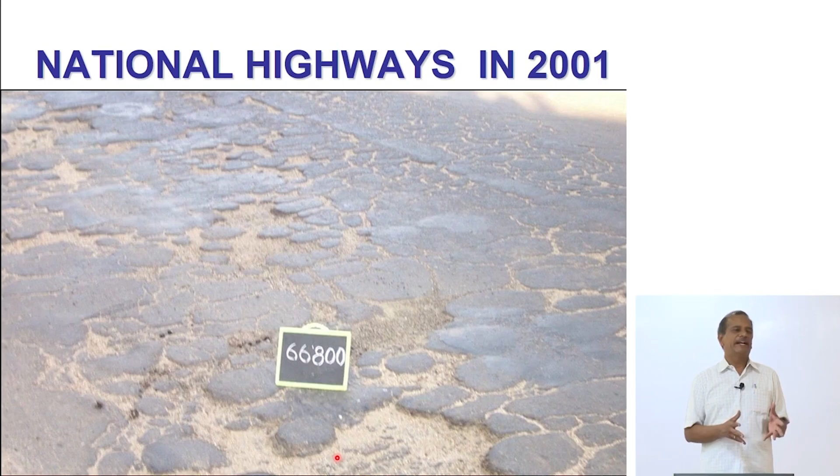But by the by, are you able to see any improvement in the quality of the roads in the country? No? Let me take you over what has happened over the last 15 or 20 years, and then you will realize what are the changes that we have made in the profession. So, if you look back in 2001, this was the condition of the national highways. The condition of the national highways from this condition in 2001 has improved over a period of time.

When we look at the conditions of the highways, what we realized from America is that America is rich because it has got better quality roads, not that America is rich and hence it has got better quality roads. The country's economy depends upon the quality of the roads. If you have good quality roads, that means the country is prosperous. I think India has now learnt from the USA. This is a well-known saying from John F. Kennedy, that it is not the wealth that builds the roads, but the roads that build our wealth.

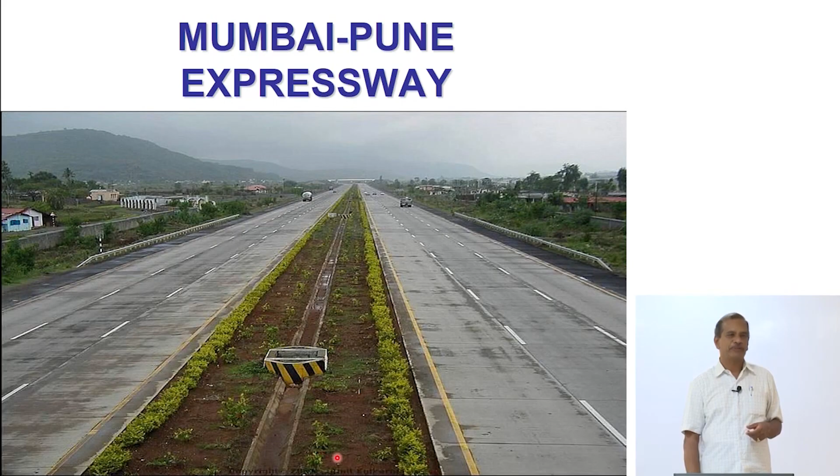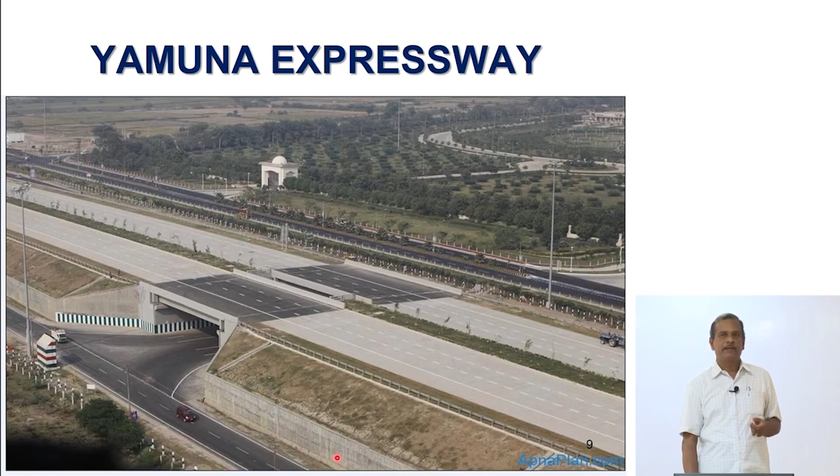Indian highways today: you said that there has not been any significant improvement in the quality of the roads. Let me show some photographs of the roads today. The conditions of roads which were very bad earlier have improved today. This is a classic example of the Mumbai-Pune expressway. We have other highways which are comparable to any other developed country of the world. We are able to see beautiful roads, scenic roads in the country today. This is a classic example of the Yamuna expressway today.

Having seen this, do you still believe that there is no improvement in the quality of the roads? Or do you think that there is an improvement? There has been improvement in the quality of the roads. But what you do not understand is: what is the cost of constructing these highways? What are the design factors? What are the issues or challenges which a civil engineering professional will face in the country during the construction, maintenance, and operation of these highways? Let me take you over the issues one by one.

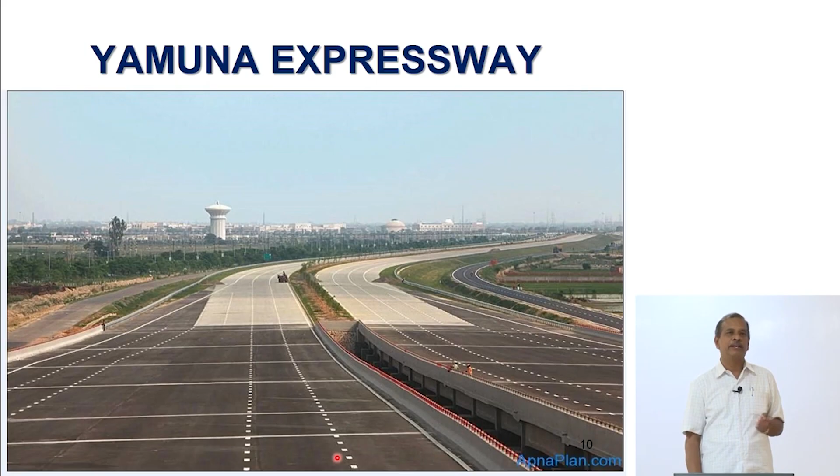If we look at the roads in the country today, this is the Yamuna expressway here. India has got the second largest road network in the world. They carry about 85% of the passenger traffic and about 70% of the freight traffic. National highways are around 1 lakh and odd kilometers, which, I will come to the statistics, constitute less than 2% of the country's road network but carry 40% of the traffic. Many of the highways are single lane or 2 lane; only a fraction of them are 4 lane, 6 lane or 8 lane highways.

Many of them are poorly surfaced, highly congested, and speeds are very low. If you go to any other developed country of the world, you will be able to travel at an average of around 80 to 100 kilometers per hour. But in India, we were able to travel only at a speed of around 30 to 40 kilometers per hour. The other agony or problem that we face in the country today is that India has got nearly 4.2% of the world's vehicles, but contributes nearly 9 to 10% of the fatalities.

So, the question arises at this point of time: good quality roads, high speeds, more fatalities. Poor quality roads, less speed, less accidents, less fatalities. So, what is it that you need? You need safety or you need faster movement of people and goods? But as you are aware, Indian traffic is heterogeneous in character. There are nearly 14 to 15 types of vehicles using the same carriageway. The speed differential between vehicles is more, with the result that there are several road crashes.

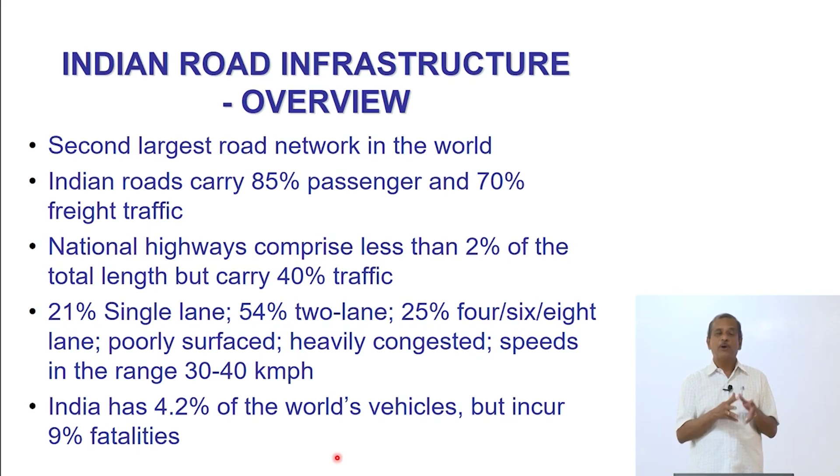So, with the result, we need to design forgiving highways. How to design the forgiving highways is a challenge before us. So, having said this about the quality of the roads here, in India, we have nearly 1,20,543 kilometers of national highways. When we talk about 2 lane, 4 lane, 6 lane, they come under this category of 1,20,543.

State highways constitute nearly about 1.55 lakh kilometers. So, out of the 54 lakh kilometers or 5.4 million kilometers of road in the country, less than 2 lakh kilometers are only national highways and state highways, 3 lakh kilometers. The balance of 52 lakh kilometers or 5.2 million kilometers of roads are other roads, rural roads. So, the question arises at this point of time, when the volume of traffic using these highways are different, we have to design differently all these categories of roads.

So, out of the 54.82 lakh kilometers of road in the country, nearly about 65% of the freight and 80% of the passenger is carried on the roads, and the vehicle growth is of the order of 10.16%. So, with the result, when the vehicles grow at the rate of around 10% per year, your single lane road will become a 2 lane road. A 2 lane road will become a 4 lane highway. 4 lane highway will become 6 lane and 8 lane.

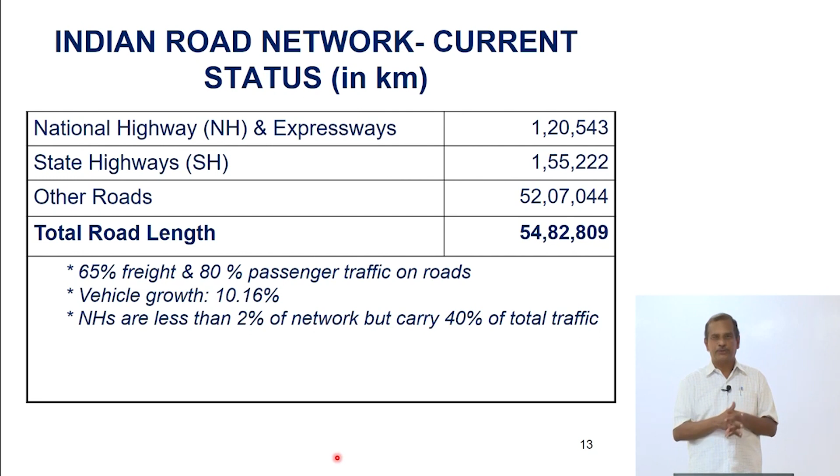So, there is no stoppage of this growth of vehicles, which means you have before you several highways which are to be converted from a single lane which is around 3.5 meter to 2 lane which is 7 meters to a 4 lane to 6 lane and 8 lane. This will be the challenges that you will face in the years to come. When you want to do this, what are the challenges and problems that you will face?

What we have done is that since we learned that the country's economy depends upon the roads, we have taken several road building initiatives. The first one that we took up in the year 2003-2004 was the National Highway Development Program, or NHDP. Under this NHDP, there are about 7 phases to be completed by 2012, but out of this, a part we could complete, a majority we could not complete because of many challenges and problems. I will come to the issues of challenges, risks, problems that we faced.

But the investment of this NHDP or National Highway Development Program is of the order of 1.72 trillion, about 172,000 crores. So, you can put 0 and count the number of zeros. One of the costliest civil engineering infrastructure is a road. So, here this NHDP consists of 2 major components. One is called as the Golden Quadrilateral, connecting Delhi, Mumbai, Bangalore, Chennai, Calcutta and Delhi. So, this is around 5,846 kilometers called as NHDP phase 1.

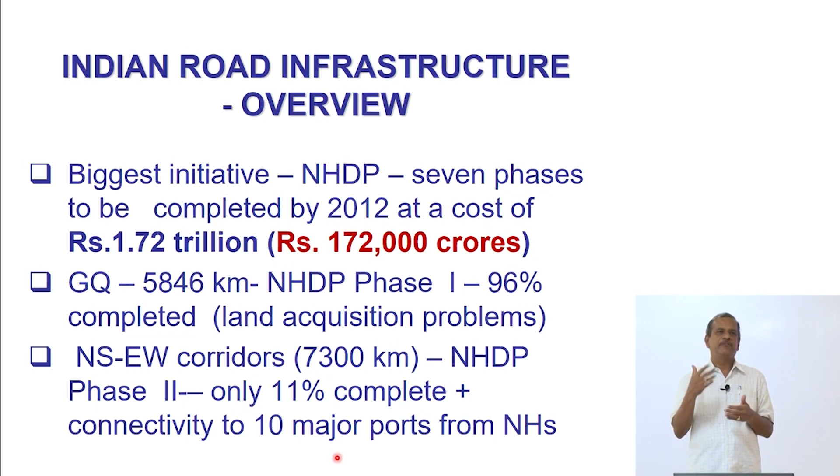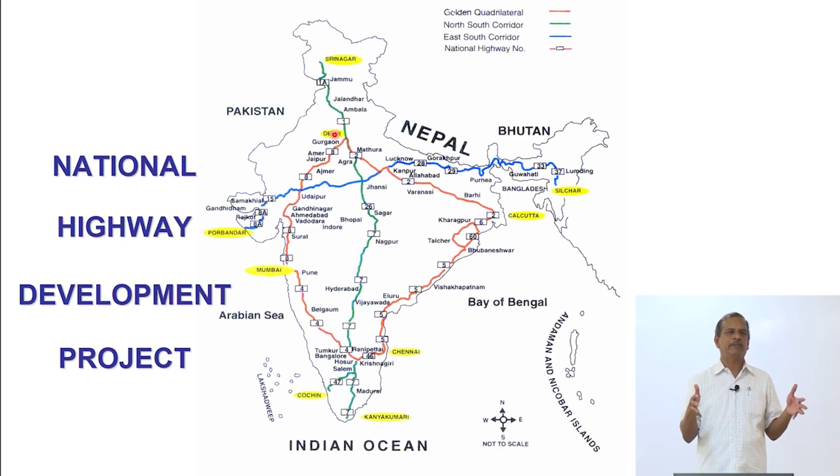So, all these highways are either 4 lane or 6 lane or 8 lane depending upon the volume of traffic. Understand at this point of time that as the volume of traffic increases, you might widen the carriageway from 2 lane to 4 lane to 6 lane. In addition, it's one of the most ambitious road development programs taken up by any country of the world. We have divided carriageways, service roads wherever it is required, grade separators, we will talk about the grade separators subsequently, overbridges, underpasses, bypasses around the congested cities, wayside amenities, also enhanced safety features.

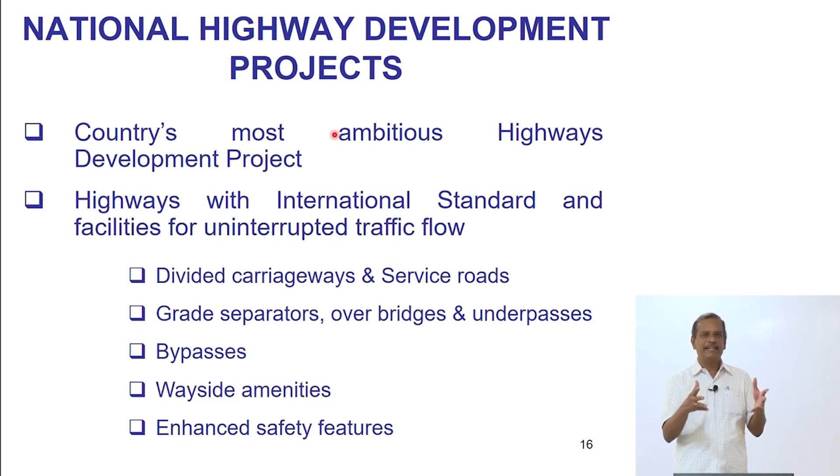When you have different types of vehicles operating at different speeds, ensuring safety for all these categories of roads is a real challenge. So, we want to build in this design the safety features as well. So, we can compare the Indian highways with any other country of the world, they are comparable. So, under the NHDP phase 3, we have taken up around 12,109 kilometers of NH. The cost is around 80,626 crores. NHDP phase 4 is improvement of 20,000 kilometers of national highways. Phase 5 is widening of the Golden Quadrilateral connecting Delhi, Mumbai, Chennai and Calcutta from 4 lane to 6 lane.

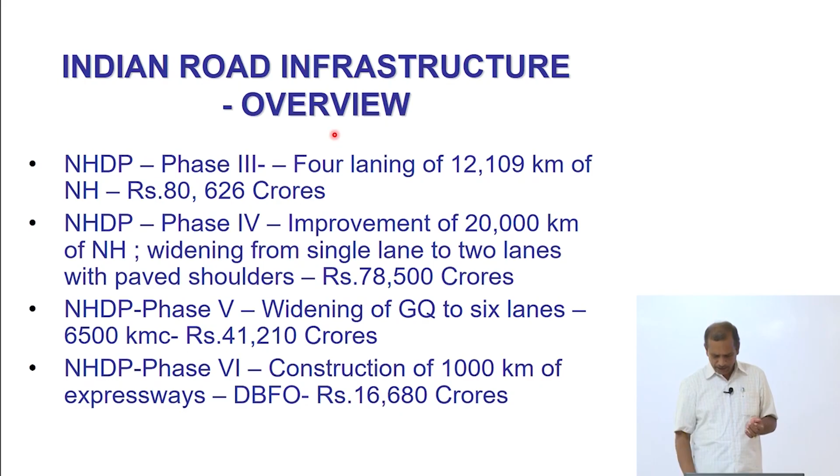Phase 6 is construction of 1000 kilometers of expressways. Under projects 6 and 7 is construction of bypasses, ring roads, and flyovers, around 16,680 crores. The Northeast has got a special privilege of having an accelerated road development program.

The beauty of this is that till about 2001, the design, construction, maintenance and operation of all these highways were taken up by the government of India. We realize that the government cannot afford to construct these highways. These projects under the NHDP are all taken up under a scheme called BOT, Build, Operate and Transfer.

The concessionaire can bid for the project, he can design, he can build, he can operate. At the end of the concession period, which will be 20, 25, or 30 years, he will transfer the asset back to the government.

The question arises at this point of time: why should you do this? Take up the profession of designing, constructing and operating a road. If you have money, you can construct a factory, run a business, or run a medical college. But if you have money, do you think investing in road construction will be a profit-making business? Will anyone take up this profession?

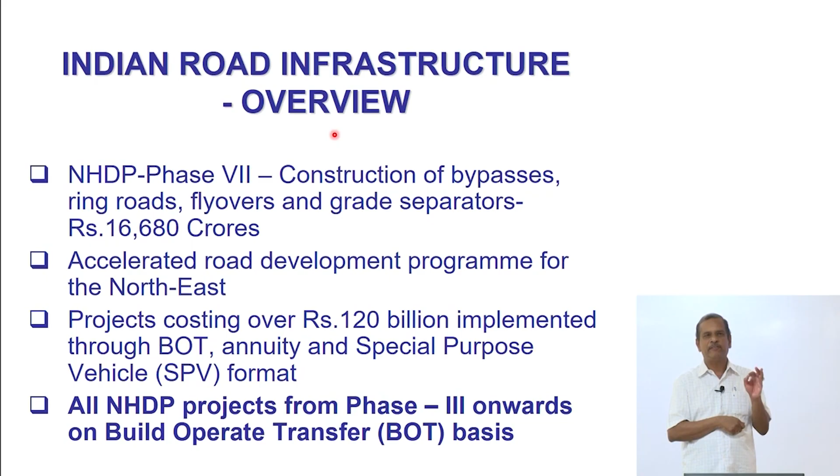To give an example of how much a roadway will cost, consider a road project taken up by L&T IDPL, Infrastructure Development Projects Limited. This road is the Beawar Pali Pindwara Tollway Limited. Every highway under build, operate, transfer is given to a road company. The road company has a board of directors. They collect the toll, they operate, they maintain, and at the end they transfer it.

This highway is around 240 kilometers. The total project cost is 2,472 crores. The cost of constructing this 4-lane highway of 240 kilometers is around 2,472 crores, which means the cost of constructing 1 kilometer of a 4-lane highway is around 10 crores. You know that we have 1,25,000 kilometers of highways. Assuming that I want to convert them into 4-lane and 6-lane highways, you can work out what amount we require for constructing these highways.

At this point of time, if I have 2,472 crores in my pocket, I can put it as a deposit in a bank and get around 13% interest. So, do you think that investing this money in the road sector will get you a higher return than doing a business or investing in a bank?

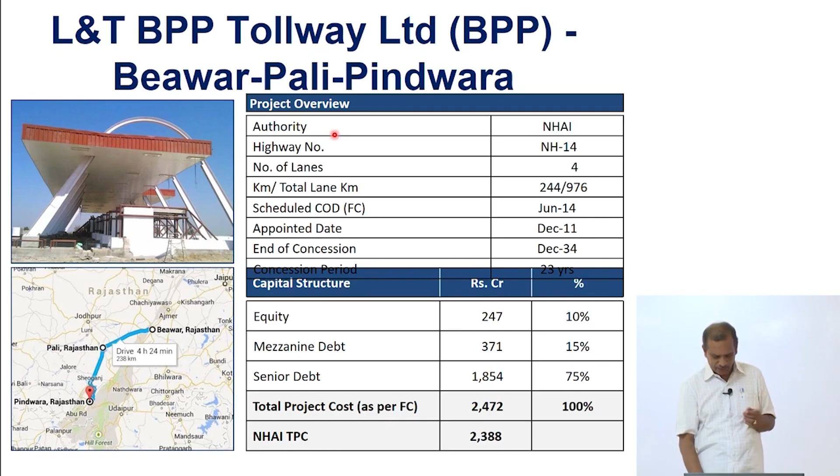Let me take you over the issues and concerns when you want to design and construct these highways. In addition to the NHDP project, the government has realized that it's time to construct more and more kilometers of expressways.

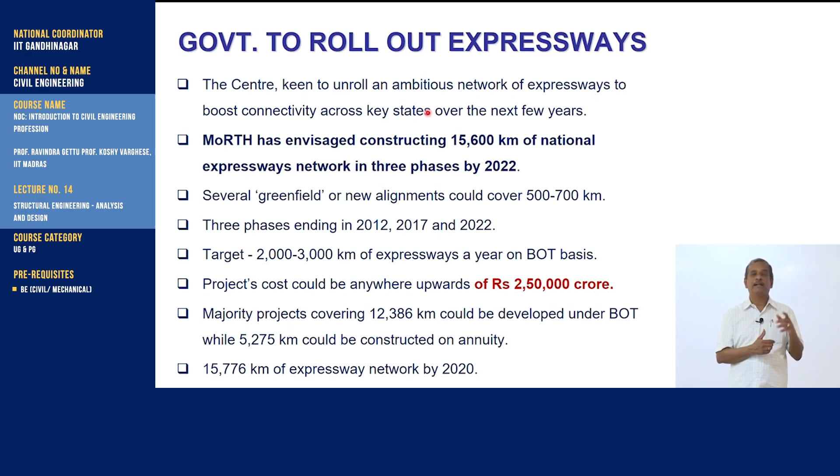We want to construct nearly 15,600 kilometers of expressway network by 2022. We have just started, so this is a huge potential for all of you. You will find more lanes of highways being converted or constructed as new expressways. This project of 15,600 kilometers will cost nearly 2,50,000 crores. You can divide by 15,600 to know how much it costs to construct 1 kilometer of expressway.

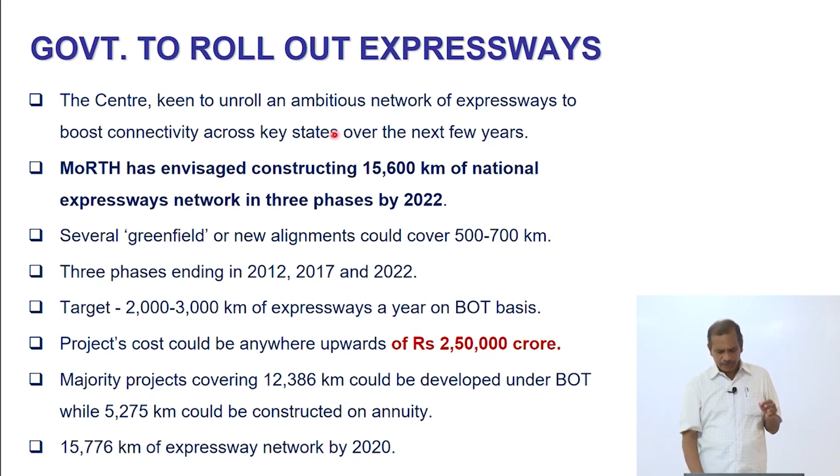So designing these expressways, catering to different vehicles operating at different speeds, is a challenge for you. We will have nearly around 16,000 kilometers of expressways in the years to come.

So if I want these highways to be constructed by the concessionaire, what do you need? The government thought over the issues and concerns. What they found is that in highway construction, 100% foreign direct investment is possible. Secondly, the government carries out all the preparatory works. The land is given free of charge, you need not buy the land. Your job is only design, construction, operation and maintenance. The government does all the preparatory work for you to design and construct the highway.

The NHDP provides capital grants of 40%, which means if 1000 crores is a project, 400 crores will be given by the government, so your loan liability will only be 600 crores. So you have to work out whether you will get this money back in terms of toll revenue.

It is Beawar-Pali-Pindwara, which I just made a mention of. The toll revenue is of the order of around 1 crore per day, around 300 plus crores every year. When you get that money out of a 2,400 crore loan, how much can I pay back in terms of principal and interest? How much money do I require for operation and maintenance is a challenge before us.

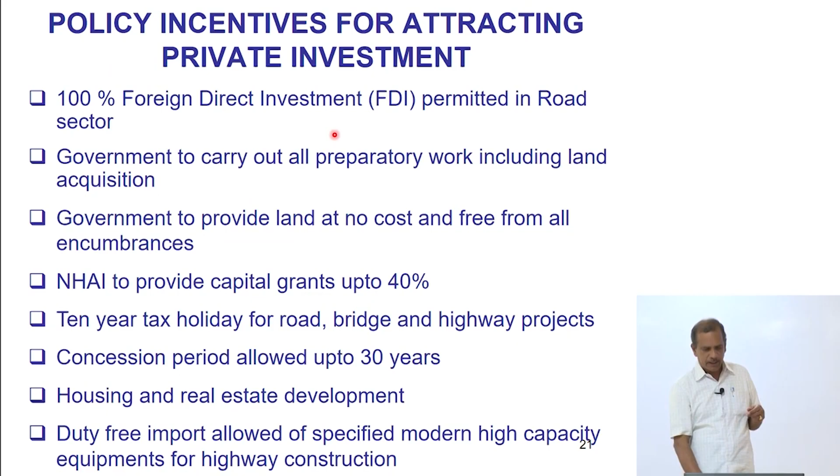In addition, the government also permits housing, real estate development, and duty-free import of equipment and machinery that you require. So the government has framed a structure in which a private concessionaire can take road building as a business, as a profit-making business. As I mentioned, these projects are under the Design, Build, Operate and Transfer, DBOT, model. So these projects have many economic benefits.

So why should I do this? What are the benefits which the government can get, which the road user will get? As a road user, the question arises at this point of time: why should I pay a toll? Can anyone tell us why you pay a toll? Don't say that I want to use the toll, the question is why do you pay a toll?

The question arises at this point in time, how much will you pay? Assume you have to travel 100 kilometers, how much will you pay? Two-wheelers don't pay, so the question of a two-wheeler paying toll does not arise. For a car, travelling 100 kilometers, you'd pay around 65 rupees. So if you pay 65 rupees per trip of that length, you should be able to work out whether you will get back the revenue you want.

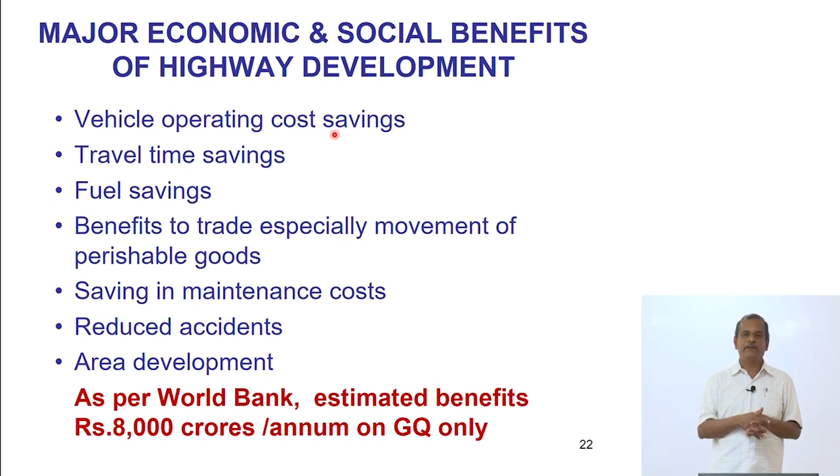Other issue is that what I have been saying so far is about a project, a case of a DBOT project where they design, build, operate and transfer. Where I said the government makes all preparatory works, gives the land free of cost, and you should only collect the toll for 20 years or 30 years.

There are projects which will get you higher returns, with the result that the concessionaires are willing to share their profit with the government. So these projects are called negative grant projects.

A classic example is a widening project in Gujarat. It's the Bharuch-Surat section, 65 kilometers. The concessionaire IDAA infrastructure has said that the project cost is 492 crores, and they say they will pay back to NHAI, National Highway Authority of India, a sum of 504 crores.

So in a nutshell, road building is a profit making business. Many cases it can be a win-win situation. The government also gets money in terms of negative grant by awarding the work to a concessionaire. It's not only the concessionaire who makes money, the government also makes money. So this money I can use elsewhere - I'll tell you where to use this money elsewhere. In a nutshell, road construction, operation and maintenance is a profit making business.

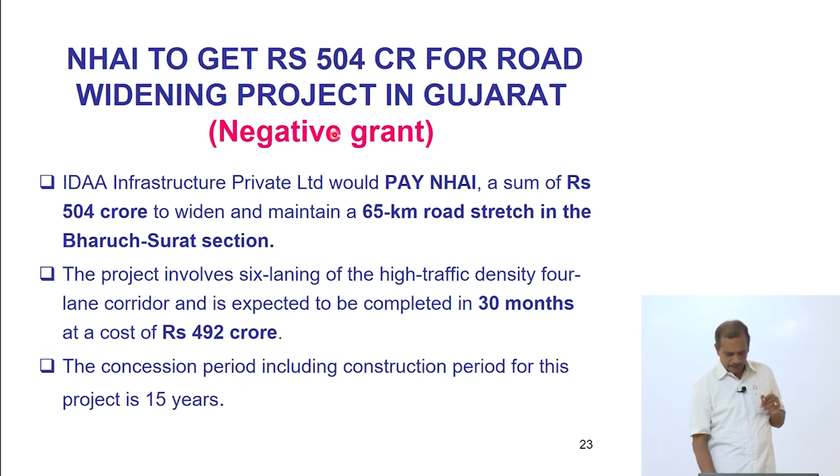When you go further to the projects taken up currently in the country, the major project is the Bharat-Mala project, wherein we thought about optimal movement of freight and passenger. We want to develop economic corridors, inter-corridors, feeder routes. We want to connect more districts, ports are to be connected, greenfield expressways are to be constructed. This Bharat-Mala project consists of 24,800 kilometers in phase 1, with an estimated outlay of 5,35,000 crores for the next 5 years.

This is where your challenge lies. When you graduate from here, you can be a concessionaire, a contractor, or a businessman taking up Bharat-Mala projects. So the issue is how should the resources be optimally utilized? The major challenge we face in the country today is how to optimally utilize the resources available - number 1 in terms of money, number 2 in terms of materials, number 3 in terms of manpower. How do you do that?

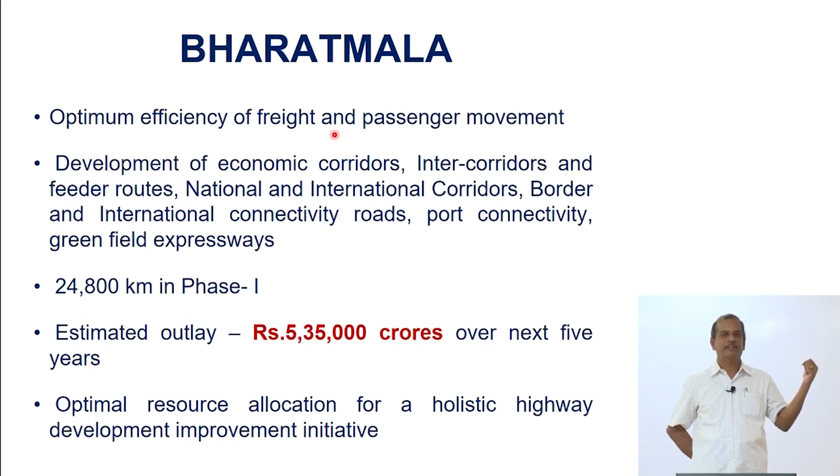I think at the end of the 4-year program that you study here, you should be able to design, construct, operate and maintain highway facilities. So when you look at these Bharat-Mala projects, earlier in the NHDP we had only 6 corridors of the golden quadrilateral - north, south, east, west corridors. This will go from 6 corridors to 50 corridors by the end of the Bharat-Mala program.

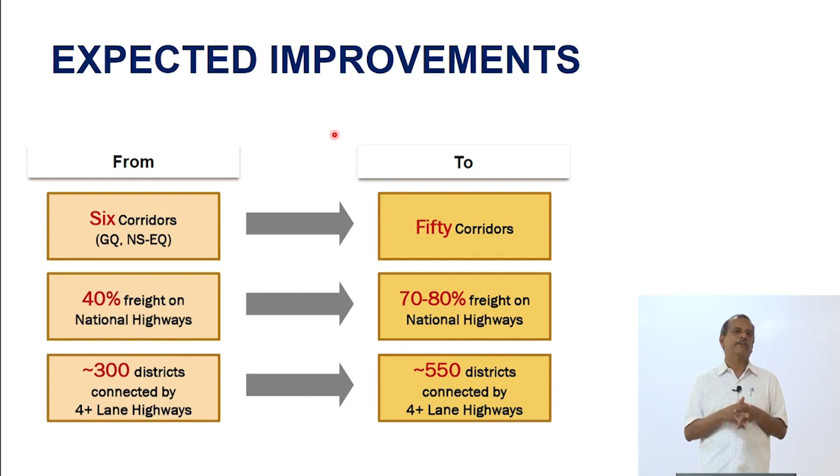Only 40% of freight was carried by the national highways. This is expected to go up to 70 to 80%. Thirdly, only 300 districts are covered by the NHDP projects. Now more than 550 districts will be covered under the Bharat-Mala program. With the result, the quality of the roads will improve, and more districts will have expressways and highways connected through better quality roads.

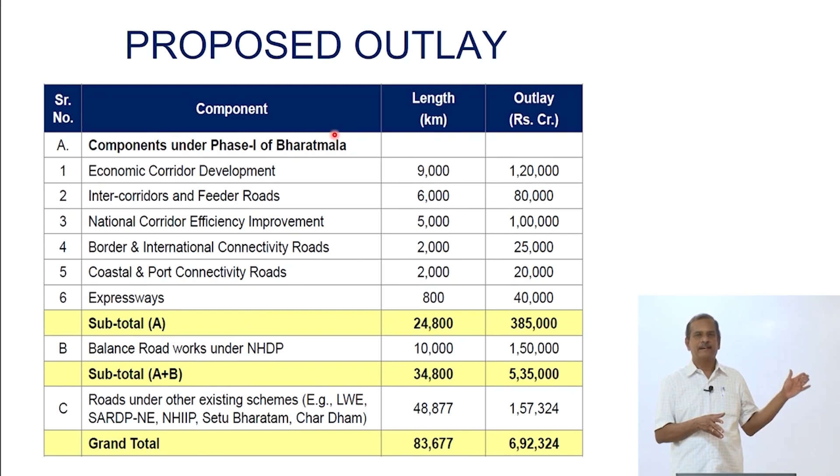The outlay, as you can see, is for economic corridor development. We will have inter-corridors and feeder roads which will connect to this Bharat-Mala program, along with the National Corridor Efficiency Improvement, border roads, international connectivity roads, port connectivity, and expressways. All this will be taken up around 83,677 kilometers at a cost of nearly 7 lakh crores. So one of the huge investments in civil engineering infrastructure is in designing and constructing these highways and expressways. That is what you should understand at the first point of time.

Leaving alone these expressways, when we come next, we talk about state highways. So we need a system of hierarchy of roads.

We have the village roads, the district roads, the state highways, the national highways, and the expressways. So, there is a hierarchy of roads in the country today.

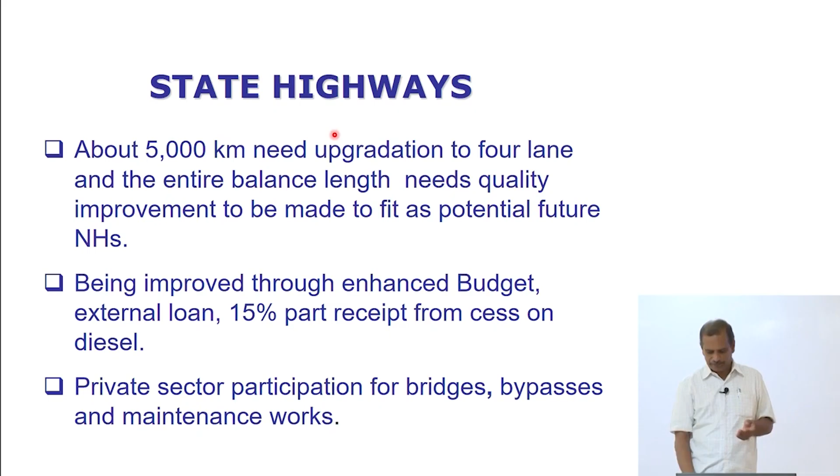We have also taken up private sector participation for construction and improvement of these state highways, from single lane to 2 lane, 2 lane to 4 lane. These are being taken up depending upon the demand. Other than that, there is urban infrastructure.

One is expressways, we talk about national highways, we talk about state highways, and now we come to urban roads. So, we had a program called the Jawaharlal Nehru National Urban Renewal Mission, with investment of the order of 1,20,000 crores, wherein we wanted to connect and improve 35 cities with a population of over 1 million.

We need sustainable development. We need the linkage between asset creation and asset management. On one hand, the issue you should understand is that creating an asset is not a major issue. Maintaining and preserving this asset is the major challenge. You need money, you need resources. I will come to the issue of how these resources can be managed.

In addition, we also have a smart cities project. You can go to smartcities.gov.in. You will get more details about the smart cities that we have identified, the improvements we are going to take, and the improvements that will take place in these cities, so that we will have world class cities in the country in the years to come.

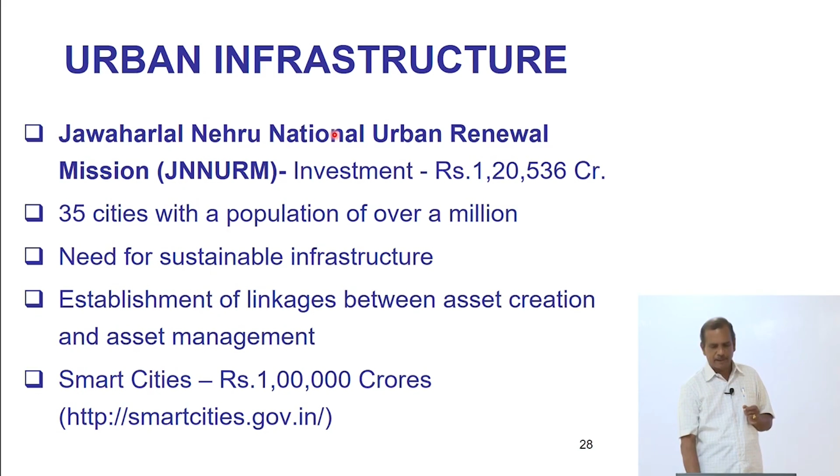Huge investment is being made for the construction of urban expressways or improvement of movement of people in urban areas. We found that only 30% of the 100 crore population lived in urban areas, but now more than 40% of the 140 crore population by 2025 will live in urban areas.

This will bring severe pressure on the urban roads, resulting in more congestion, more delay, more accidents, and you will be required to construct more flyovers, underpasses, interchanges, bypasses, new roads, and circular roads.

A classic example of how vehicular growth has impeded the movement of people and goods can be seen from Bangalore. You would have been able to travel maybe around 30 to 40 kilometers per hour, maybe 10 years back. Today, the average speed of travel is not more than 10 kilometers per hour. If you want to travel 15 kilometers, you require 1.5 hours. So, you have vehicles, you have roads, but you are not able to move.

So, what is the solution you can think of? This is a challenge before us. Urban road and urban infrastructure improvement is the third major challenge we face, apart from expressways, NHDP, state highways, and urban roads.

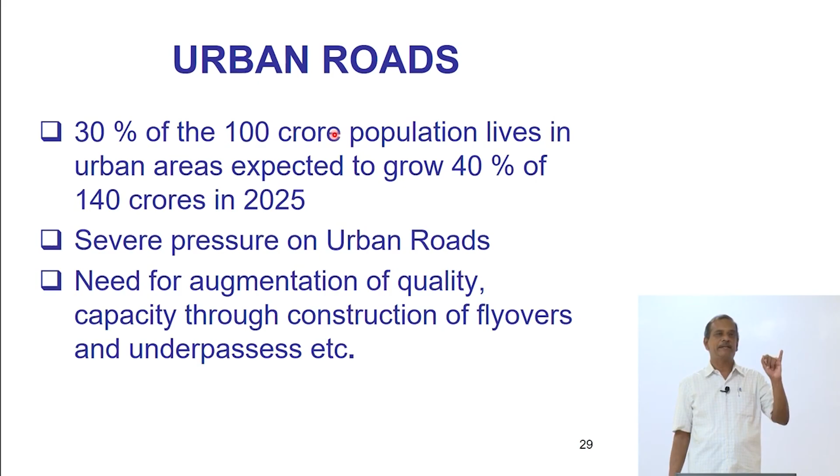The fourth issue before us is the construction of other roads, outer ring roads. To give an example, consider how much we have spent for the outer ring road for Chennai. The outer ring road is around 30 kilometers.

You can go around Chennai. If you want to go around Chennai on the outer ring road, you can try this outer ring road from Vandalur to Nemilicheri. The investment for this 30 kilometers is around 1,000 crores, which means the cost of constructing each kilometer of this outer ring road is more than 30 crores.

If you want to construct this outer ring road, you need money, but more importantly, you require materials. The challenge before you as a civil engineer is the non-availability of materials for construction. I will come to that issue now.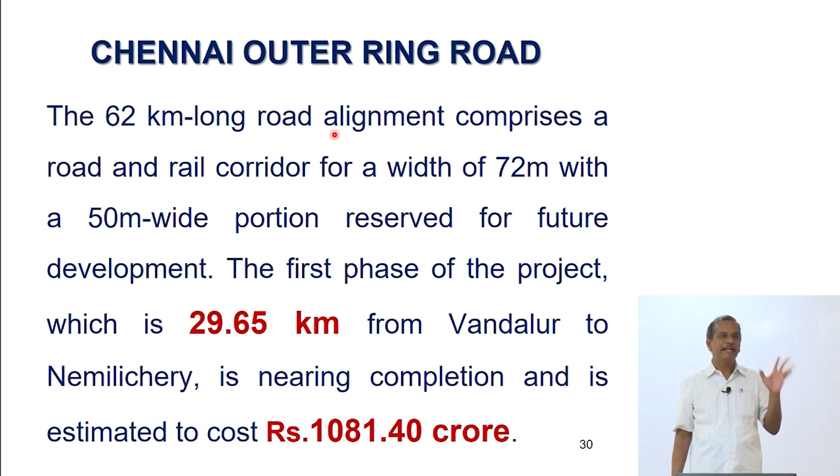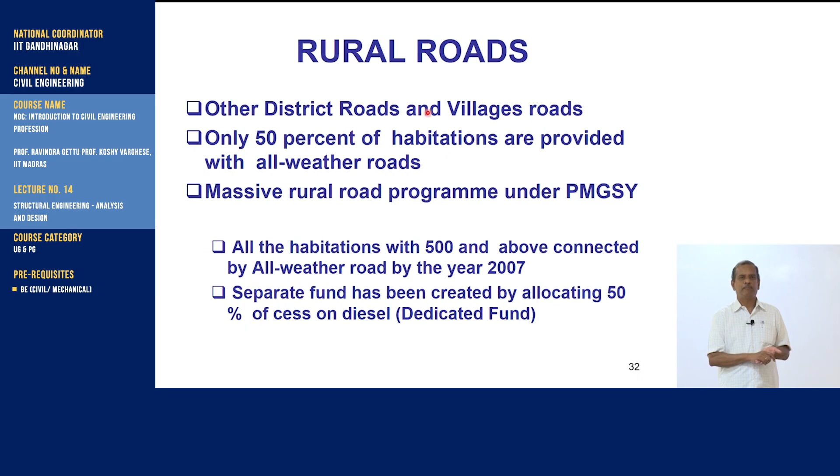Apart from NHDP projects, expressways, state highways, and urban roads, as I mentioned in the beginning, nearly 52 lakh kilometers of road in the country are rural roads. About 20 years back, we started this rural road program called the Pradhan Mantri Gram Sadak Yojana, PMGSY. Under this PMGSY program, we wanted to provide an all-weather road to all villages with a population of 1000.

All-weather means motorable all through the year. So, initially we wanted to connect all villages with a population of 1000 with an all-weather road.

We connected all villages. Then we took up the next phase to connect all villages with a population of 500, which we have completed today. We have moved forward, and now we are in the process of connecting all villages with a population of 250 with an all-weather road.

A separate fund has been created for this rural road program. You should remember there are two components of payment of tax to the government. One is the conventional tax, which you pay when you buy every liter of petrol or diesel. But the issue is that when you pay a tax, that tax money can be used for any purpose by the government, for example defense, education, or healthcare. You may pay a road tax, but it can be used for any other component. Whereas if you pay the money in terms of cess, the money has to be utilized only for the purpose for which it is collected.

So, for every liter of petrol and diesel that you consume, you are paying 2 rupees as a cess. 1 rupee is earmarked for NHDP, 1 rupee is earmarked for rural roads. So, a dedicated fund is available, and funding the rural road is not an issue.

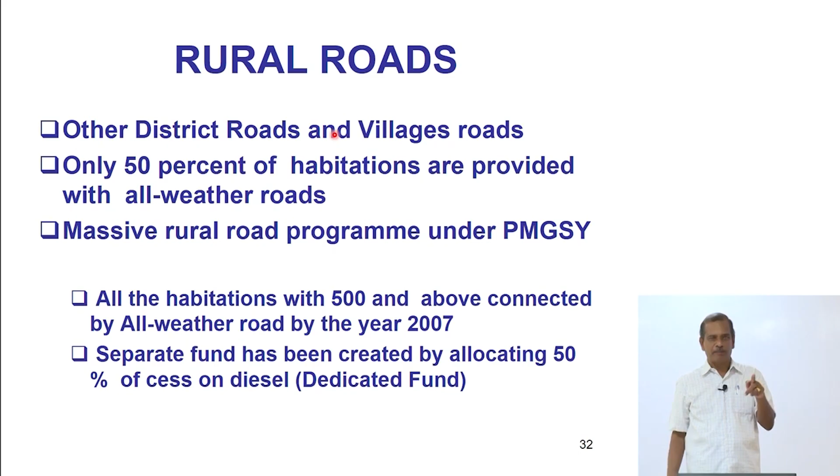The private sector will not come forward to construct rural roads. There is no question of tolling a rural road; nobody will pay a toll. If that is the case, who will construct the road? The connectivity is to be provided only by the government, so we need to get money for constructing these rural roads.

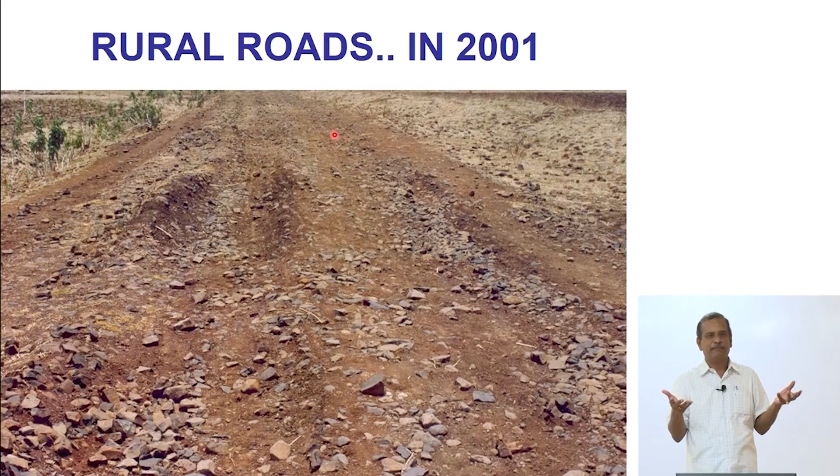This was the condition of rural roads in 2001. They call it a metal road. Now, with the growth in the economy, there are no more bullock carts with steel tires. Now every house in a state, for example Tamil Nadu, with more than 7-8 crore population, has got a motorized vehicle. If that is the case, nobody would like to go on a road like this. Every village has got several vehicles now.

Under the Pradhan Mantri Gram Sadak Yojana, later called the Bharat Nirman program, we had spent nearly 48,000 crores, centrally sponsored. The money we were getting was more than 2,500 crores initially per year, and now more than 5,000 crores is being made available every year from the diesel cess. As a result, we are able to provide better quality rural roads in the country today.

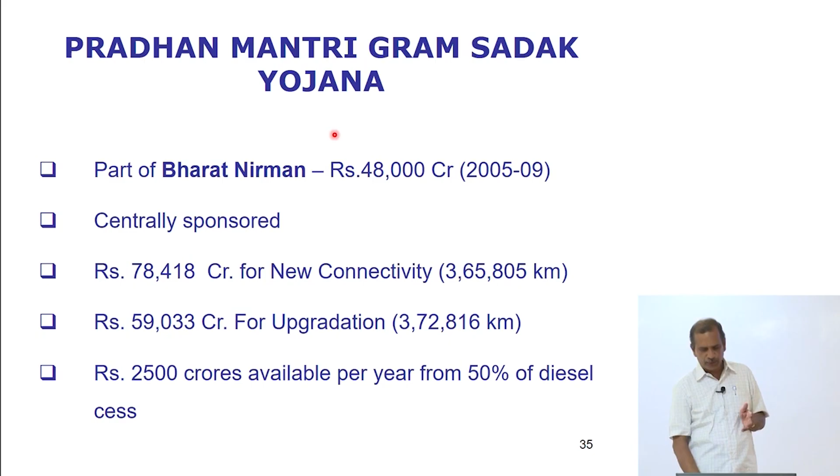Out of the 5,89,317 villages, unconnected habitations number around 3,30,000. The country's economy can grow if and only if the rural roads are also improved.

On one hand, I talked about savings in travel time and savings in vehicle operating costs. But we should also see the benefits of providing better quality roads to the villages. By providing better quality roads, the education level improves, health improves, and villagers are able to sell their products at a much better price. So the economy of the villages also grows. In a nutshell, more societal benefits come from improving the quality of village roads, while more economic benefits come from improving the quality of highways.

So the issue arises at this point: what are the challenges before you? What is there to construct this? What you are seeing on top is a black surface, but what has been buried below, you do not understand or know at this point in time. The major problem faced today in India is the non-availability of materials for construction. So I have money, I have the design, but I don't have materials to construct.

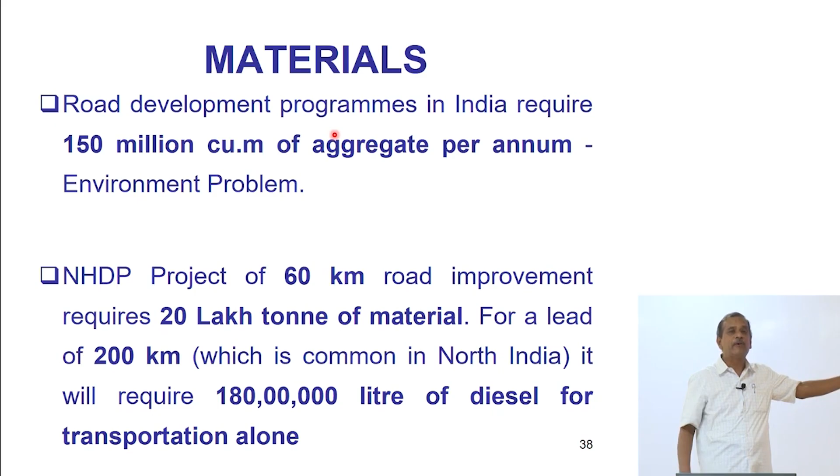Road will undergo deterioration. You will find cracks, you will find potholes. So, if that is the case, again I need to provide an additional thickness of this pavement in terms of bituminous layers. If that is the case, where do I get materials? So, the major first challenge that will be faced by all of you when you graduate is: when materials are not available, how am I going to construct these highways? That is the first or the major challenge before you.

For designing a pavement, for example, you estimate what is the traffic that is likely to use a highway. We always consider only commercial vehicles, trucks only, for the pavement design. If you look at the pavement design, the thickness of the different layers, what you are seeing at the top is only the black layer, where 50 is the top bituminous layer, 170 is again a bituminous layer, 250 may be a granular layer, 300 millimeter may be a soil layer.

So, in all, for a pavement where the strength of subgrade is around 5%, I require nearly 77 centimeters of pavement thickness if the expected traffic is around 150 million standard axles. We express the number of commercial vehicles in terms of standard axles. A truck is supposed to carry 12 tons. If a truck carries 12 tons, the front axle is supposed to carry 4 tons, the rear axle will carry nearly 8 tons. This I call a standard truck.

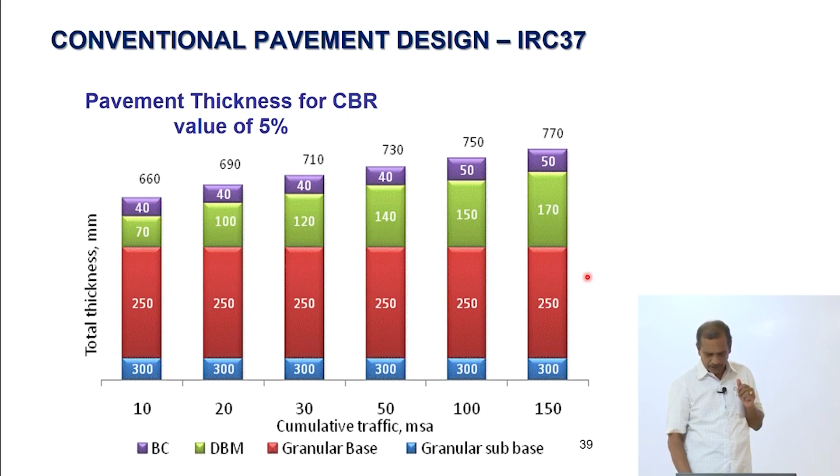When the vehicle carries higher and higher loads, the damage that they cause to a pavement increases exponentially. Suppose the number of vehicles that are likely to use it in a period of 15 or 20 years is 150 million. I require about 770 millimeters as the thickness of the pavement layers. So, in this, I require nearly 15,000 metric tons of aggregates for constructing 1 kilometer of a 2-lane highway.

So, typically a 60 kilometer stretch will require about 20 to 30 lakh tons of aggregates. For constructing the outer ring road, which I had mentioned for Chennai, we have considered more than a lakh cubic meters of soil. We have a huge quantity of material that we consume. Where do we get this material? How to design and construct different layers? What you are seeing at the top is only the black top, but what is buried below is different layers, different materials. When materials are not available, how to make the structure long lasting and sustainable is a challenge.

As the road undergoes deterioration, your vehicle operating cost will also go up. So, the next challenge is how to ensure that the road that you are designing and constructing lasts longer, gives good riding comfort, and you are able to travel smoothly, comfortably and safely. So, it is not only designing and constructing that is a challenge; operation and maintenance is also a challenge before you. How to construct a forgiving highway, how to build in safety features, how to ensure that the average speed is more than 100 kilometers per hour.

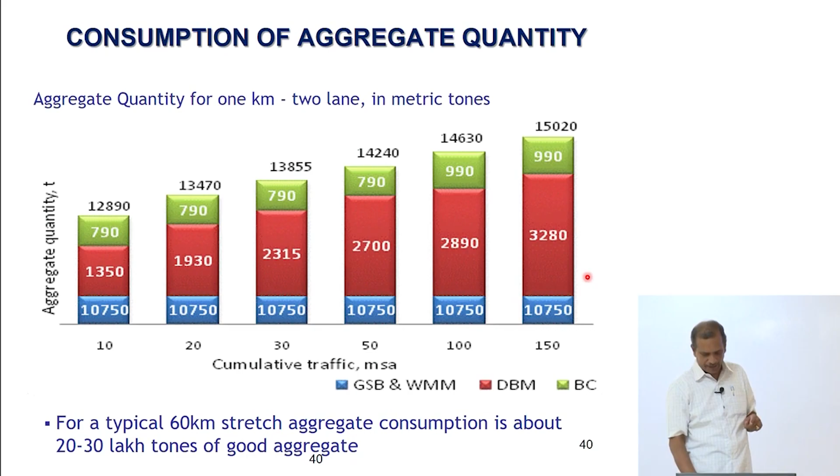So, when should I convert a 2-lane road into a 4-lane? When you convert a 2-lane into a 4-lane, you require more quantity of materials. Materials are not available. If so, what is the challenge and how do we design this? So, if you want to do this, the challenge before you is the selection of the pavement type.

So, what you are seeing, the black top which you are seeing is called a bituminous surface. We use bitumen for road construction. Americans call it asphalt, British call it bitumen; both are one and the same. They are obtained by the fractional distillation of petroleum. So, in the fractional distillation of petroleum, the black residue at the bottom is the bitumen.

So, this we use for road construction, but this bitumen, which is a residue, a waste product of the refinery, is being sold at a cost of 30 to 40,000 rupees per metric ton. We require several thousand metric tons of bitumen. So, in a pavement, the bituminous layer alone will cost nearly 40% of the total pavement cost.

The issue arises at this point of time: we have to import crude, we have to get material for construction. So, is a bituminous road the only option available to me for construction? If you look at this, the second question that you should understand is that if I construct a road, how many years will it last? Will it last for 30 years, 20 years, 15 years, 10 years? So, when it fails early, it needs more early maintenance.

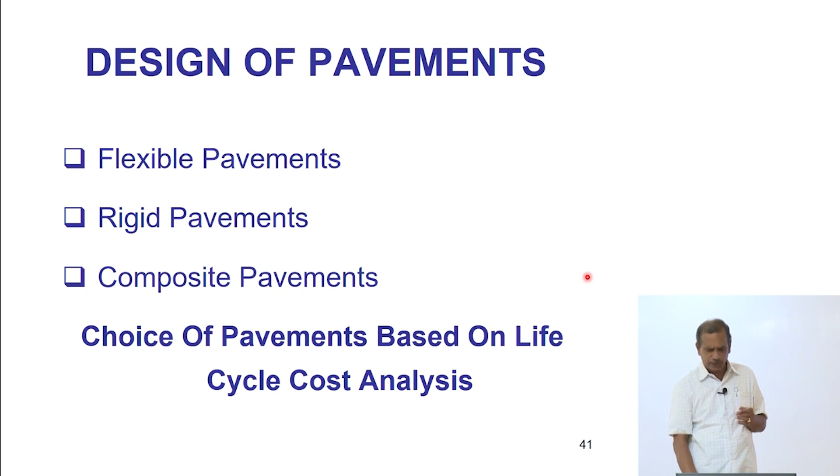So, when you look at the design of the road which should last longer, if you are a concessionaire, you would like to construct the road and forget about it. For 30 years, it should not warrant any maintenance. So, that is the case. You can design the road as a flexible pavement or a bituminous pavement. In a bituminous pavement, I have the embankment, I have a subgrade, I have a subbase, I have a base course and a bituminous layer.

The black top which is seen at the top is the bituminous layer, whose thickness is maybe around 150 to 200 millimeters, but costs nearly 40% of the total cost. I need a granular layer as a base course, a granular layer subbase and about 500 millimeters of subgrade. Huge quantities of material are required if you want to construct a bituminous road.

Weak materials, the load distribution will be sharper, higher stresses will come at the bottom onto the subgrade, which means the subgrade will be affected and you will find an undulating surface on the top. So, if you want the stresses to remain within the allowable limit, either you should increase the thickness or have better quality materials. So, one option before you is to choose a bituminous pavement. The other is that I can also go in for a concrete pavement.

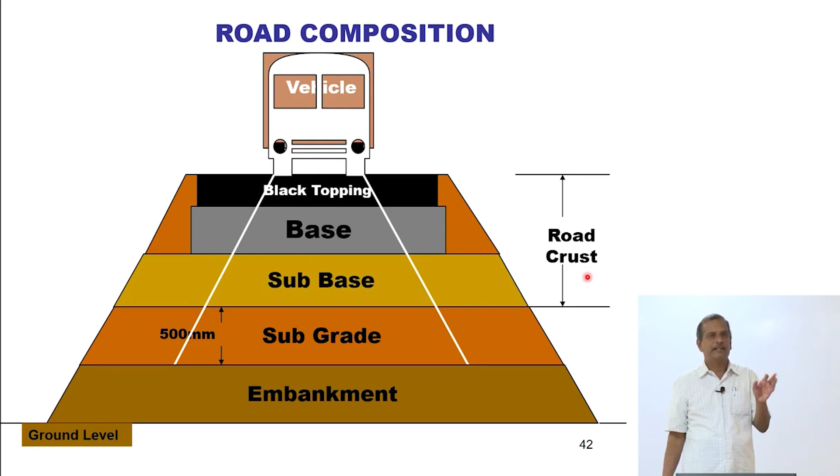The issue is that when I construct a bituminous pavement like this, the life of this bituminous or flexible pavement is around 15 to 20 years. It cannot last more than that. Alternatively, if you go in for a concrete pavement, it lasts nearly 30 years without major maintenance. Secondly, the thickness of the concrete pavement is much lower compared to a bituminous pavement. But the cost of constructing a concrete pavement will be slightly higher than a bituminous pavement.

The cost difference varies as of today. When bitumen is around 30,000 rupees per metric ton, the cost of the concrete pavement will be higher than the bituminous pavement by around 20 to 30%. The issue is: should I spend more initially and spend less on maintenance, or spend less initially and spend more on maintenance subsequently? So, that is a challenge that you will face.

When you design a road, no one will tell you to design a bituminous road or a concrete pavement. So, it is the job of the civil engineer to decide the appropriate pavement type which will last for 30 years without major maintenance. So, when material is not available, how we are going to design the structure is a challenge before us.